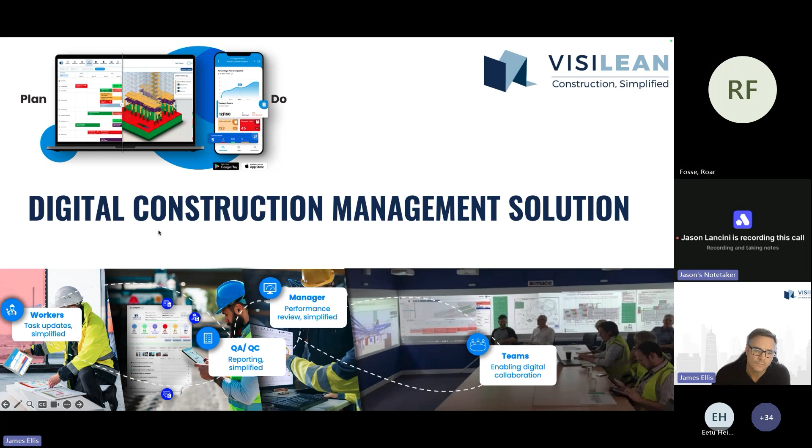I'm going to give you a few slides on who we are, what we do, who we work with, and talk a bit about the system. Then I'll show you some live software and hand over to my colleague Paramajit, who's going to go through all of our new features, our tech stuff, and our new UI.

A little bit about the company. VisiLean was originally developed in the UK for academic purposes only, released on a proof of concept back in 2012, and our CEO decided to commercialize this business.

We are a Finnish company with offices in the UK and India. We've got several partners around the world, and we are now running in over 20 plus countries, and we're still heavily involved in the Lean and BIM communities.

I've just given a few examples of customers, not to be clever with that, it's just to say that we're working in every single sector - pre-design, design, pre-construction, and construction.

We started with general contractors as our forte and where we saw the issues. We have now evolved this to working with clients and owners, consultants, general contractors, subcontractors, trades, whether it's a giga complex project right down to very small projects that just need a simplified process from an Excel point of view or a short takt planning screen.

VisiLean is capable for very complex elements.

Our solution, just to give you an insight - we import any schedule from any solution directly into VisiLean in minutes, seconds to be fair. It also has the capability of creating schedules and being a planning tool as well. We can use that to then split the activities and break down milestones, tracking commitments, mapping constraints through the platform.

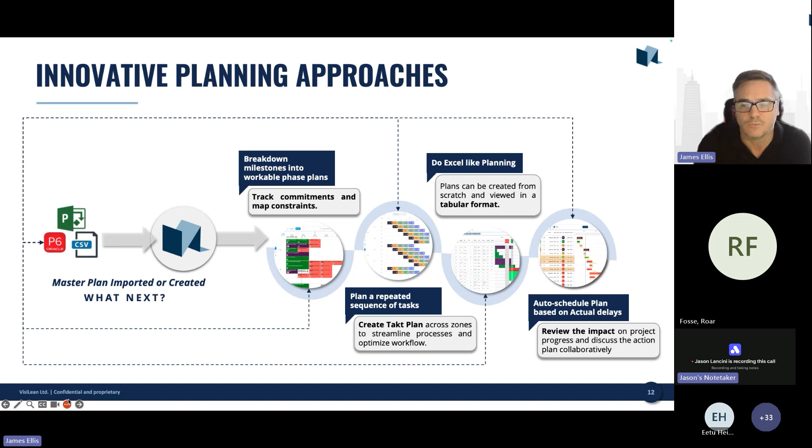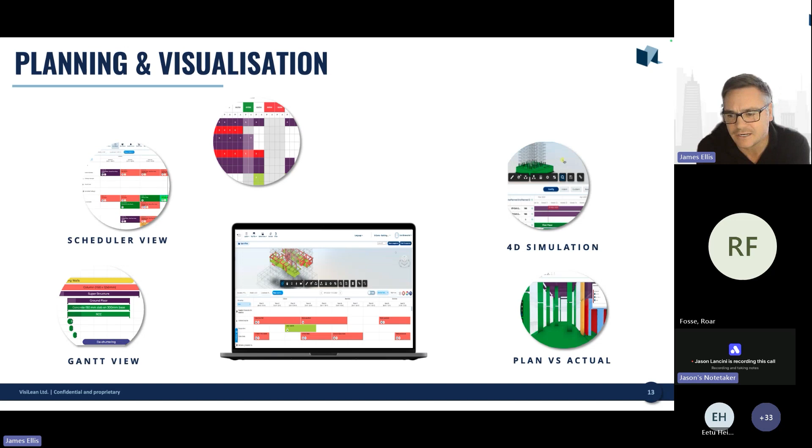Just to give a quick visualization, VisiLean is all about the planning and visualization. We've tried to cover this for as many different stakeholders, sectors, requirements, and user preferences.

We've got the Gantt view for planners. We have the scheduler view, which is a digital last planner solution, or a diary system to those that don't follow Lean, allowing us to look at this in the 2-week, 4-week, 8-week, 12-week look ahead, which I'll show you.

Table view for Excel, takt planning as I mentioned, but we also have integration with ACC or Autodesk Forge built into the platform to allow us to not only do 4D simulation, but also see planned versus actual in real time.

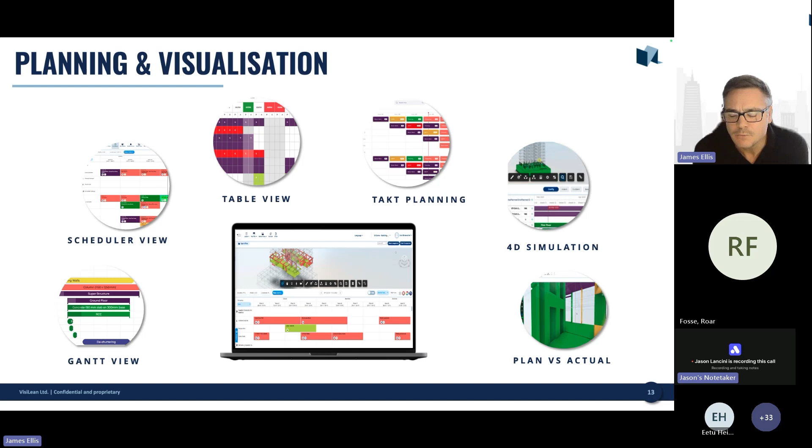I'm going to show you some. The reason I'm showing you the mobile on the screen is you can't physically see what I'm doing at this end or what the mobile looks like, but this is just to give an insight.

We have a screen that allows me to see multiple projects at any point and see where we are on the move with PPC, percent plan complete, and see where we are with delay tasks, stop tasks, how many constraints.

An end user would then have the ability to access their activities in hand and be able to update progress with their finger - a very simplified update with percentage or quantity of unit - and we have an alert button and a stop button to raise issues.

All of this is then opened up similar to a WhatsApp group where you can attach constraints, videos, voice notes, signatures. We can do checklists, etc., all of this syncing back to the main system.

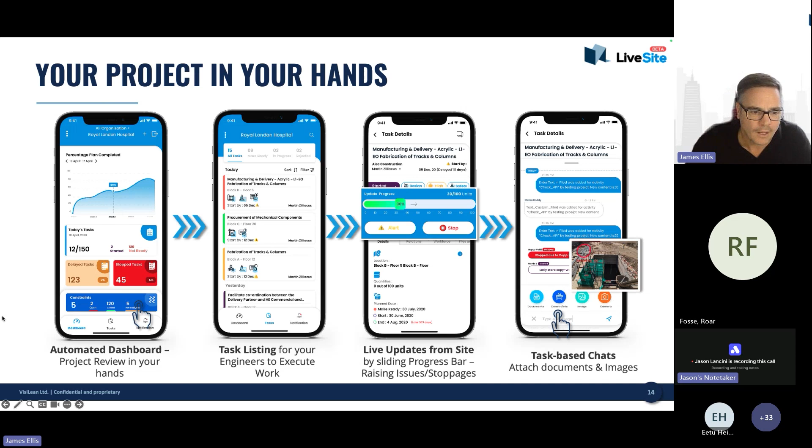And integrations - we're all talking about Lean and Takt and all of these solutions, but obviously on a project site there's a lot more platforms that are becoming more apparent, new technologies.

VisiLean originally started out as a digital collaborative planning solution, but we've now evolved the platform to integrate with all planning software, BIM technologies, document management solutions, reality capture, drone technology, Power BI, ERPs, etc. So we have the capabilities of integrating into multiple different solutions from one single source of data.

And a last slide, and then I'm going to show you the system. This is just some snippets - we are all doing the same thing, we're all trying to show our software and get the clients' best interests for our platforms. One of the key factors is actually what the return on investment is or what the benefits really are.

We have civil engineers, lean experts and architects that are all part of our team. So when we deliver this, all of the platform is implemented with these type of specialists. It is key to us to make sure that we are getting an improvement.

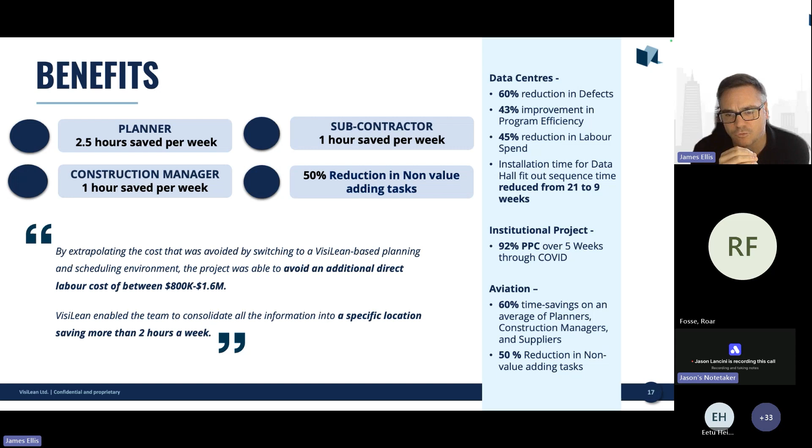When you log into this, you instantly get an overview of how far through we are, how complete, how many tasks are alerted, stopped tasks, and the percentage of the plan complete based on what we said last week and what we plan to do.

When I open the program up, I will instantly be accessing a dashboard showing real-time information from the program. Whether you use P6, MSP, ASTA, or Vico, you will see the percentage of where we should be today versus where we actually are at the top.

We can track multiple baselines. We can track tasks that are delayed, which is automated. We can track any tasks that's been stopped and drill down into this information and view it at a very quick glimpse of a button.

I mentioned attachments. We can attach and integrate with document management solutions so that we're tying up the same information.

On the dashboard, we talked about constraints. We have a full constraint management solution that allows us to log constraints against an activity, and we have to then commit the activity to the worker or the team to allocate who's going to remove it, who's going to provide this permit to work, who's going to commit to it, who's going to replace it, so that we can't move forward until we lift that constraint.

If you are an ACC customer, you can actually log in with your ACC credentials and it tracks design issues, BIM issues, and brings it straight into the platform.

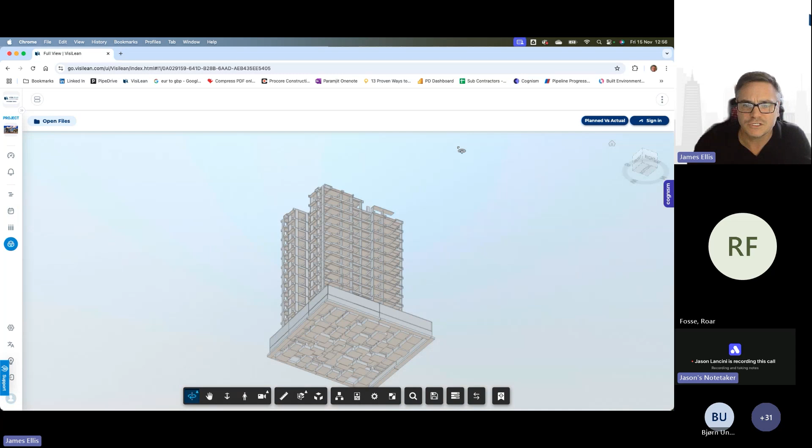We've then got the ability to integrate with the BIM model, which now allows me to see the Forge viewer built into the platform. If the customer is already using ACC, we complement their platform by logging in with your credentials, and it will bring in all of the BIM docs, everything into the system. One of the key factors of VisiLean is not just that it can bring in the models - we can track design issues and version control as we go.

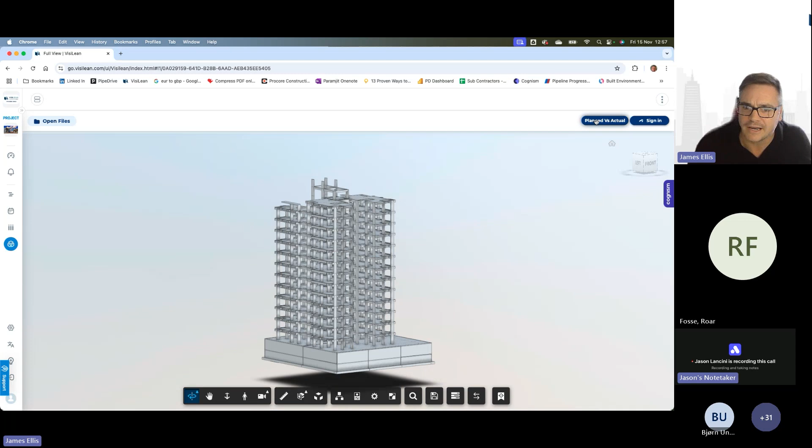One of the key factors is we can link the plan to the model, and in seconds we get a view of where we are today. On the left-hand side of this vertical bar, it tells me that everything except those columns and the two tiles should all be in progress, shown in purple. When I go back the other way, you can instantly see they're red, meaning it's actually stopped.

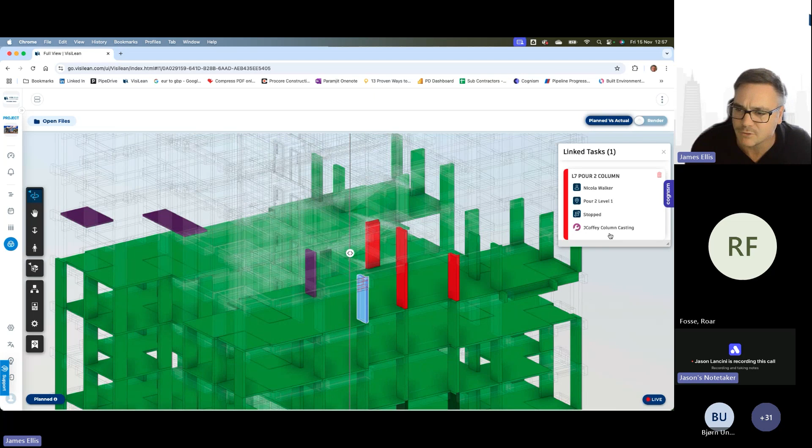I can click on the activity and it will bring up the trade, the worker, information. I can communicate with the worker from here. On top of this, I can split the screen, and now it's showing me not only the model with the plan at the bottom, but I can also look at the scheduler, which shows me all the work coming up next week.

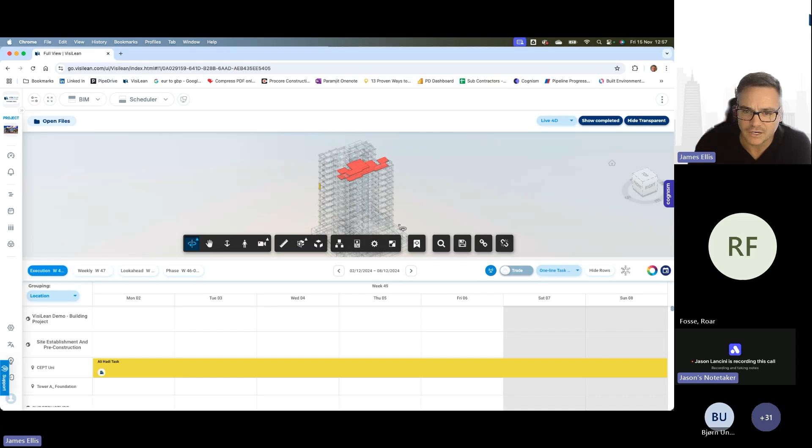What's happening the week after? What's happening the week after that? Actually, let's look at a 4-week look ahead. Let's look at a 12-week look ahead. The idea being that you can see the activities appearing.

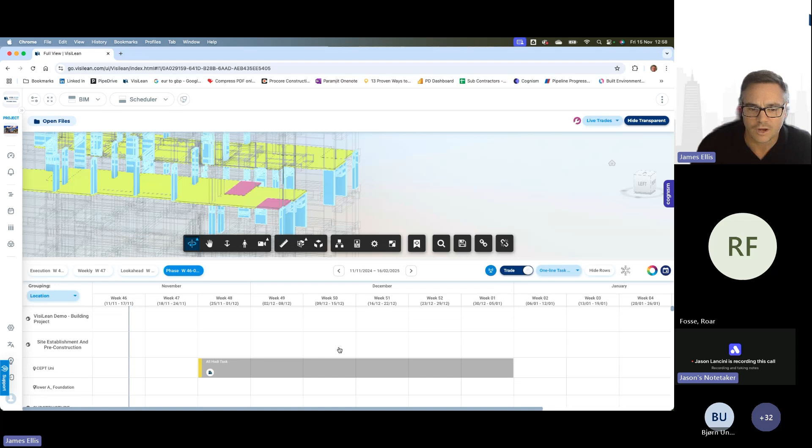So when you're doing your short-term planning and collaborating with trades, the trades can actually see what work is coming up for them. We can even turn on the trade colors, so each trade is only going to see their work available in the period we're looking at. What you can see here is two colors flashing - that's telling me I have a clash of two trades working in the same location at the same time. I can go down to the bottom, see that it's the pink team and the yellow team, and move those tasks around to realign them. So that's a very quick glimpse at the 4D side of this.

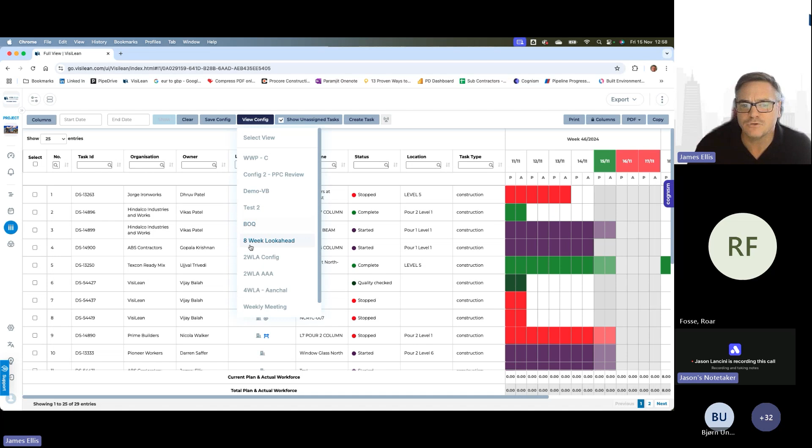The last bit I want to show you is the table view. Now the table view has an Excel look and feel, so all of the same data you are looking at, you have the same capabilities of seeing it in an Excel format, so that people used to Excel can still move backwards and forwards with it. The beauty is we can look at an 8-week look ahead, or a 2-week look ahead, a weekly work plan. We save all the views for you to save in your own configuration.

If I want to dynamically search, it will allow me to see tasks that have been stopped and just highlight this information. Once again, this property panel will appear on the right.

Lastly, I'm going to show you the dashboard integration before I hand over to Paramjit. This is where we have our own iframe built into our platform that allows us to create whatever kind of dashboard you wish. This is all real-time information - whether you want to see a daily progress report, a PPC over 3 months, or an earned value analysis.

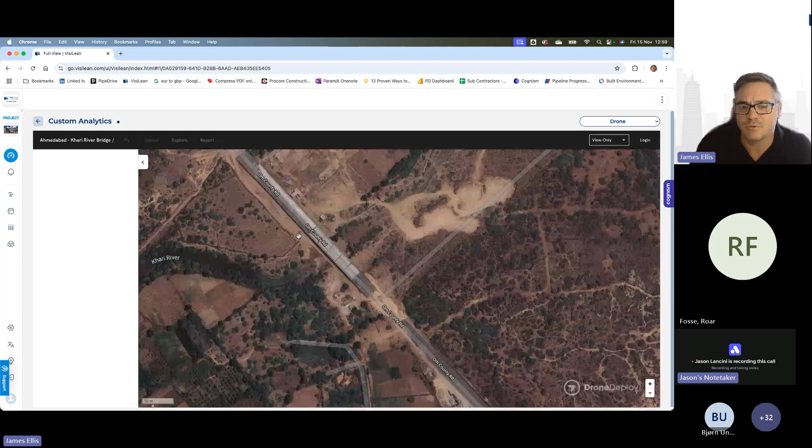On top of this, if you're going down the route of future software and want to integrate drone technology, we have the capabilities of pulling this information, overlaying it and integrating multiple different platforms. So the whole idea is we have our own experts in-house that can track not only daily huddles, but planning of weekly PPC, and we can do earned value analysis.

We can even see, from a client's perspective, an overview portfolio of all your ongoing projects in one screen. So this is a quick overview from my side.

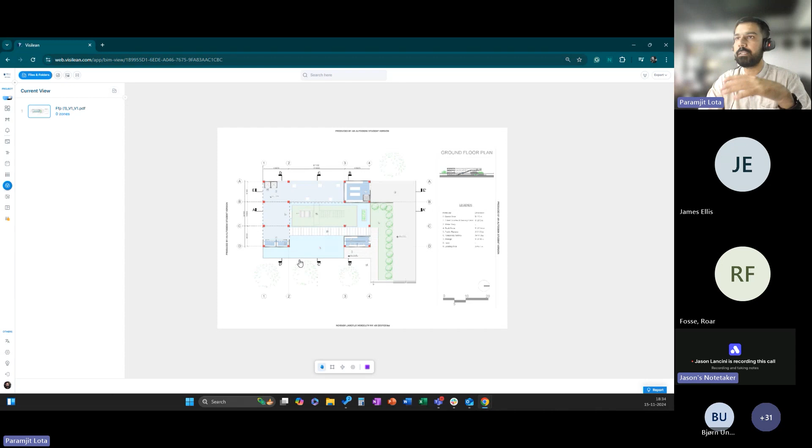You can also split this window and look at your takt plan at the bottom, and look at all of the zone breakups you'd like to create right at the top. You can start to define shapes, define zones, and you can see this new zone that's just been created comes up here.

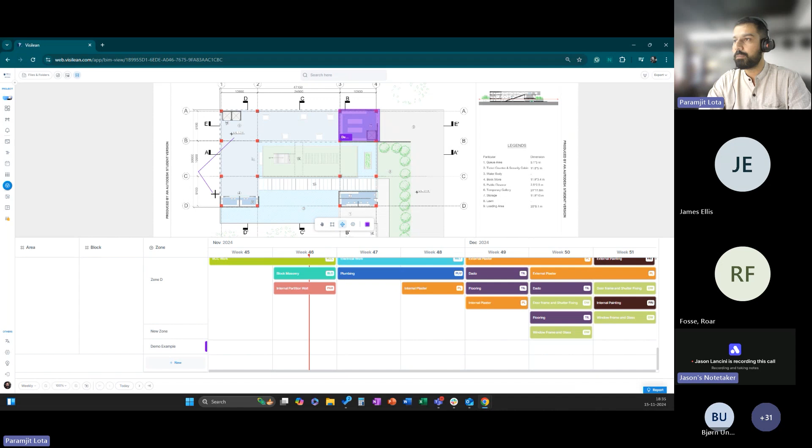I'm going to show this as a demo example, is what I'm going to call it right now. As I'm doing these updates, you can see that demo example happen right there. I'm also getting a bit of a preview in my drawing to tell where the zone is and where it belongs. I can create different options of how I want to define my zones, customize them the way I'd like, and also color them in a choice of mine.

Just moving on now from here, I've got another view I want to show you. Once you've built all your templates and sequences, you can manage them directly in the system, so you also have practically version control for the templates I was talking about.

We've introduced a brand new table view. This is the table view that James was showing you earlier, but this is an advanced new version of that. It allows you to change things very rapidly, it's easier to work with, and allows for instant filtering once again. This has functionality practically replicated from Excel — you have the option to drag and fill data, customize it, and you'll have inline editing as well, which makes this view extremely powerful.

One last thing before we wrap up is that I have the option of visualizing all of my tasks, projects, and activities through this maps approach, where for linear projects I can visualize key points I might want to highlight, drop pins, and mark areas as per my choice. I can also import KML, KMZ files directly from what I've been provided for the project.

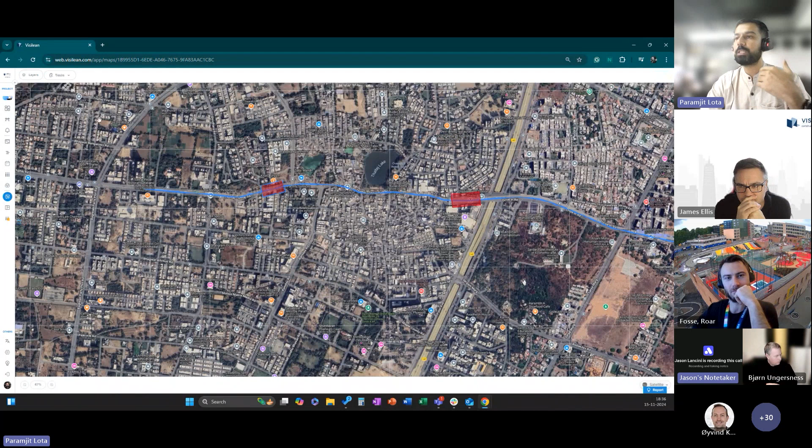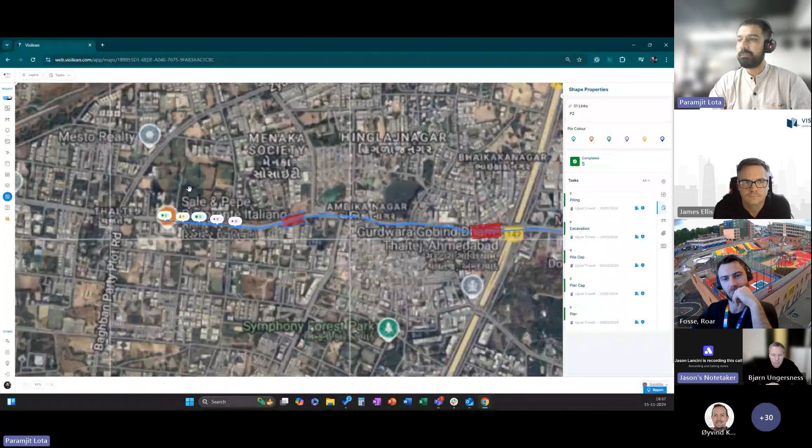I can also switch from that to visualizing, once the tasks are connected to those zones and locations, what the status of work is in that area. I can see 5 tasks overall in progress, out of which 1 is completed but 4 are not ready. Here, all my 5 jobs are done, and I can see what work has been going on. We're now going to have photographs as well to be visualized here, and constraints. So for your linear projects, you can switch from satellite to even street view, visualizing photographs, constraints, and tasks in the map view as well.